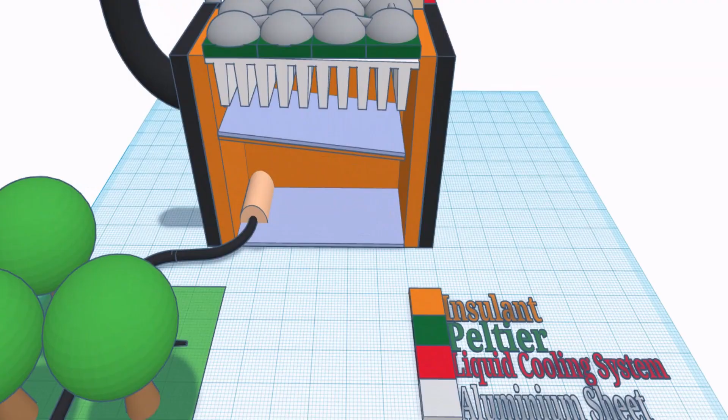Peltiers are thermoelectric coolers that include semiconductors inside. When current is applied to the semiconductor, one side heats up and the other side cools down below 0 Celsius. We will have placed aluminum plates on top of the cool side of the Peltier. The fans in the system will redirect the air to the aluminum plates. These aluminum plates serve the purpose of increasing the surface area where we can condense humidity.

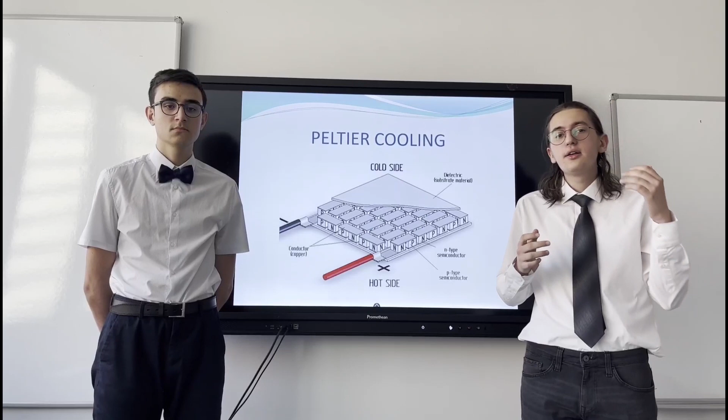Then, thanks to sub-zero temperatures produced by the Peltier, the water vapor trapped in our system will condense into water. The condensed water will then drop down into our water tank to be stored until use. Naturally, when one side of the Peltier cools down, the other side heats up. The more efficient we want the system to be, the colder we need the hot side to be. For that, we have decided to attach liquid cooling systems to the Peltier's hot side. These coolers will keep the system from overheating.

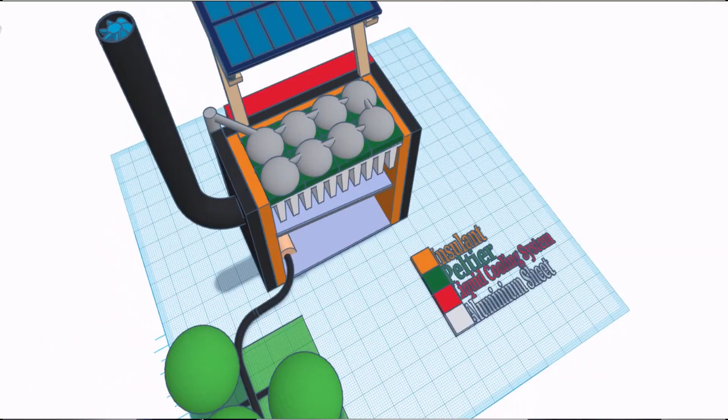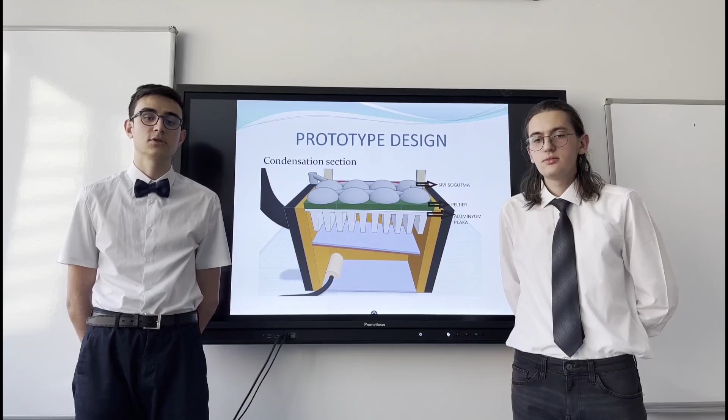For this project, we want to draw the air a few meters above ground level to not decrease the humidity close to the surface, which the crops will need. To achieve this, we designed a chimney-like system that stems from the system and rises up a few meters above the ground to draw the air. The important part of the system is that it has to be heat insulated. If heat is absorbed from the atmosphere of the area, it will drastically lower the efficiency of the system. As you can see, we insulated the Peltier coolers as well as the water tank from heat.

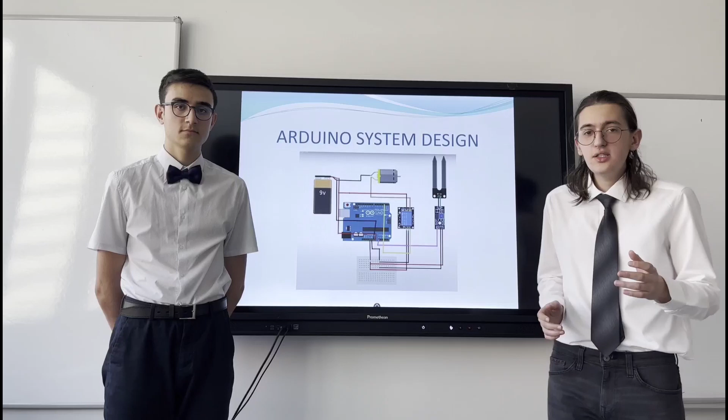Next, we have put soil moisture sensors periodically along the farmland. These sensors use an Arduino chip that has code adjustable according to the properties of both the soil and the crops. This way, in case of a moisture drop in the soil, the system can automatically irrigate the crops using water stored in the tank.

Peltier cooling is a very electrically efficient system. This means that this project can run entirely on solar panels. Unfortunately, the condensed water will not be rich in minerals, unlike water found in nature. However, we can use filters that contain minerals or additional fertilizers when mineral-rich waters are needed.

Finally, we present to you our prototype of the system. Even though this is a very small-scale prototype, we still managed to produce 54 milliliters of water in just an hour or two. Sadly, the experiment was done without heat insulation, and this drastically lowered the amount of water we produced. During the experiment, we tried many different designs for the Peltier systems to see which one gave better results.